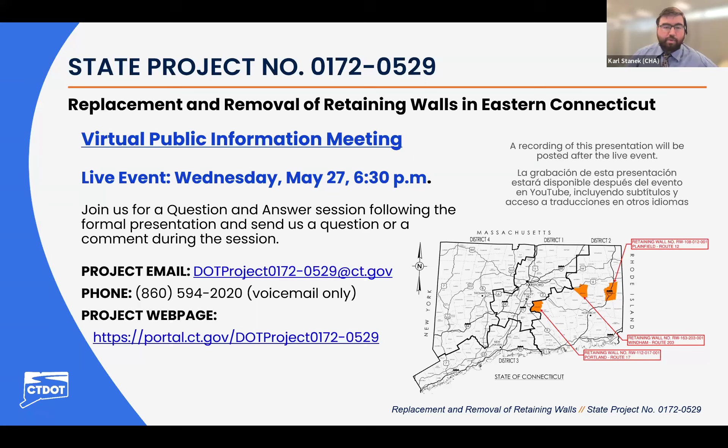First we'll talk about the general meeting overview and go through some housekeeping items. We'll introduce the project team and show you how you can interact with tonight's meeting through Zoom. We'll also have a formal presentation of the proposed design of the retaining wall projects, discussing first the wall in Plainfield, then a quick Q&A, then discussing the wall in Portland, another quick Q&A, then discussing the wall in Windham, followed by a Q&A that will encompass all of the walls if everyone has additional questions after. We'll explain the existing conditions at each project site, define the purpose and need, and talk about the proposed retaining wall and roadway improvements.

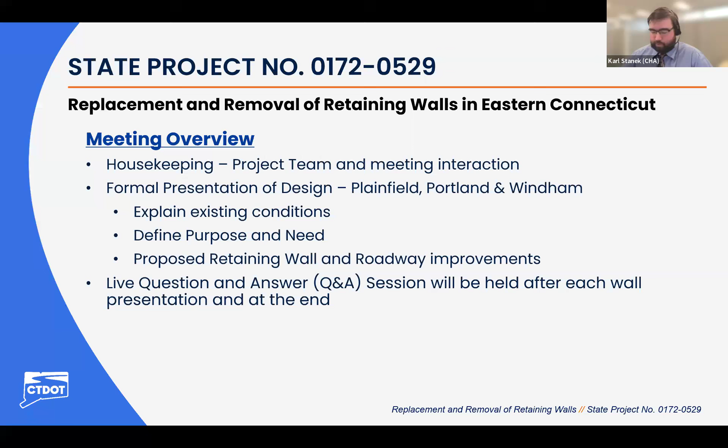First, we'll talk about Title VI and your civil rights. No person shall, on the basis of race, color, or national origin, be excluded from participation or subject to discrimination in the development of this project. Title VI information can be found at the following link, which, if you're audio only, is portal.ct.gov/DOT/opportunity-and-business-development/TitleVI.

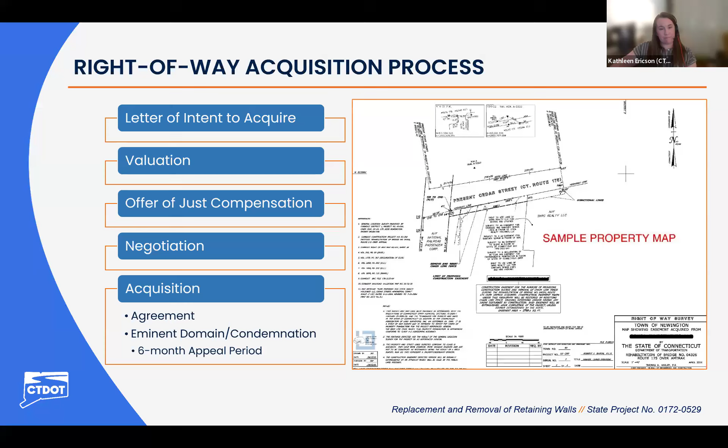Thank you, Kathleen. As we discussed, we will be talking about three walls tonight located in the east part of the state. The first being Wall 108-12001 in Plainfield, then Wall 112-17-1 in Portland, and the last Wall 163-201, 203-001 in Windham. Spread out a little bit, but all in the District 2 maintenance district in each part of the state, which is why they were chosen to be included in this single project.

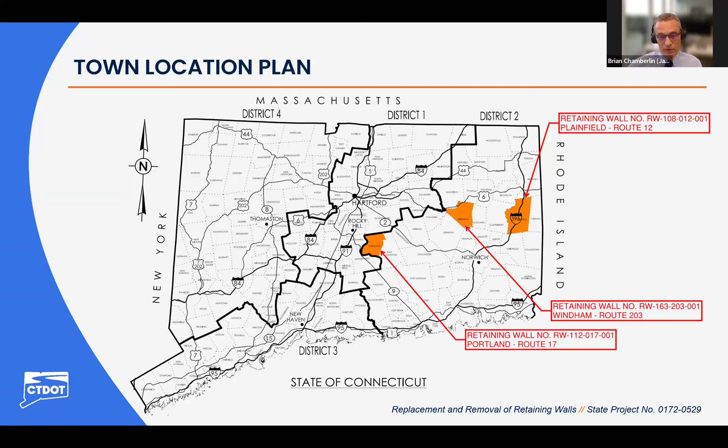Next slide, please. I'd like to start talking about the project's purpose and needs. Our purpose is to address deficiencies of retaining walls to accommodate safe travel for all people using the roads. We need to identify and repair, remove, or replace sections of deteriorated walls, maintain stability of the walls or the slopes, maintain functionality of all utilities, and most importantly, maintain safe travel on roadways, both during and after construction.

Before we go too much further in the presentation, I just want to give a little background as to where we're here today. This is actually the second phase of an ongoing program. In phase one, the department initiated a statewide inventory of these existing walls. We visited and created summary reports with a condition assessment at each site. The department reviewed these reports, and based on the condition reports, they selected a number of walls that they felt needed further attention. That's where we are here tonight. This is phase two of the project, in which we've done a more in-depth assessment of the walls, and we'll be presenting our recommendation for addressing the current conditions.

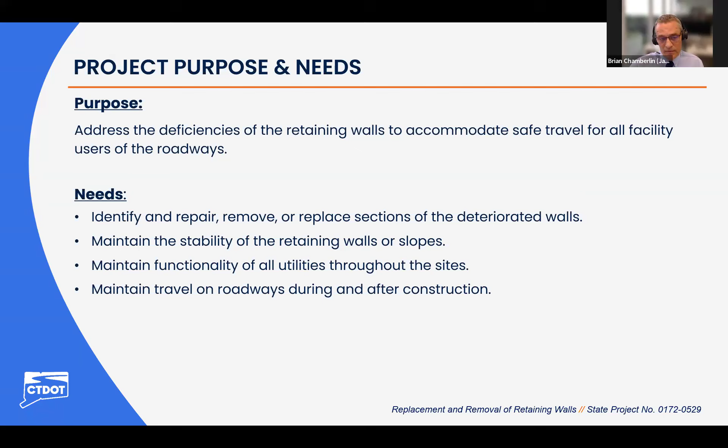Talk a little about the schedule and costs we expect. Design and advertise will be late summer, early fall of next year, 2027. We expect construction to begin spring of 2028 and be completed fall of 2028. So it's a single construction season project.

The approximate cost estimate based on current design status is $4 million for the three walls being presented tonight, and that will be with 100% state funds. There is no cost to the towns. We'd note that this cost and schedule are preliminary and subject to availability of state funds, and may change as the project continues through the design phase. We are still very early in the design process.

Next slide. So the first wall, as I mentioned, is in Plainfield. This is a retaining wall, 108-012-001. If we take a minute to explain the wall numbering system, the RW obviously is retaining wall. What we've done is each wall gets a 3 number group designation.

The 108 is the town number, for Plainfield. The 012, the second number group, is the route number of the road the wall is located on. This wall is located on the southbound side of Route 12. The 1 is just the numbering of the walls - this is the first wall in the list of walls on Route 12, so 001.

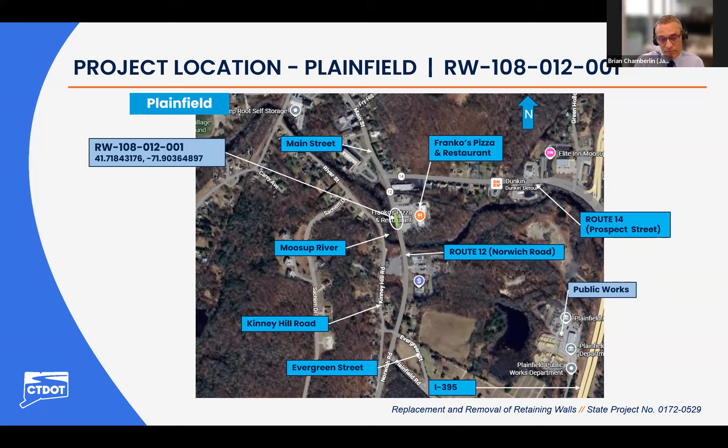Next slide. The wall is a dry masonry wall, and the year of construction is unknown. The wall is approximately 150 feet long, and the average height is about 8 feet. It supports Route 12 along the Moosup River.

The total wall length is about 150 feet, but the wall ends flare away from the roadway at each end and tie down into the slope at both ends for the grading. The roadway itself, Route 12 or Norwich Road, is a two-lane roadway carrying northbound and southbound traffic.

The road is classified as a minor urban arterial road. The average daily traffic, the ADT, based on 2022 counts, was approximately 6,200 vehicles per day. The posted speed here at the site is 30 miles per hour. Note that the posted speed does increase to 40 miles per hour south of the existing wall on the southbound side.

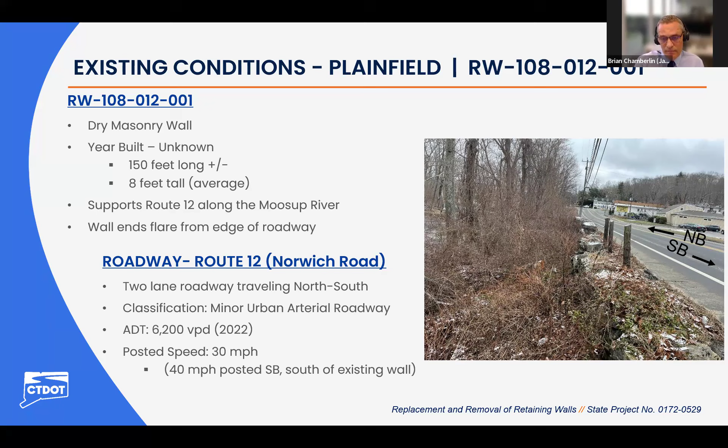Next slide. Talk about the existing conditions of the wall. First, start with the condition definitions. It's a very broad scale, a 3-point scale going from 0 to good. I just want to note a 0 or poor rating doesn't mean the wall is going to fall down. It's a very broad scale giving us a way of assessing the walls overall.

Looking at the condition notes, there were two areas noted with wall face bulging, about a 6-inch bulge, bulging outward about 30 to 40 feet from the ends of the wall. Based on current department guidelines, a bulge in a masonry wall is an automatic 0 stability rating, which is what we've assigned here. So the stability rating is 0 just due to those wall bulges.

But the backfill settlement rating is 2. There is no settlement noted of the roadway above. The wall is functioning as designed, so there's no current concern of wall failure. We give it a structural rating of 1. Obviously it's a fairly old wall, so it's not new anymore, but structurally it's in relatively fair condition. But there are some areas we felt would require being addressed based on the overall condition.

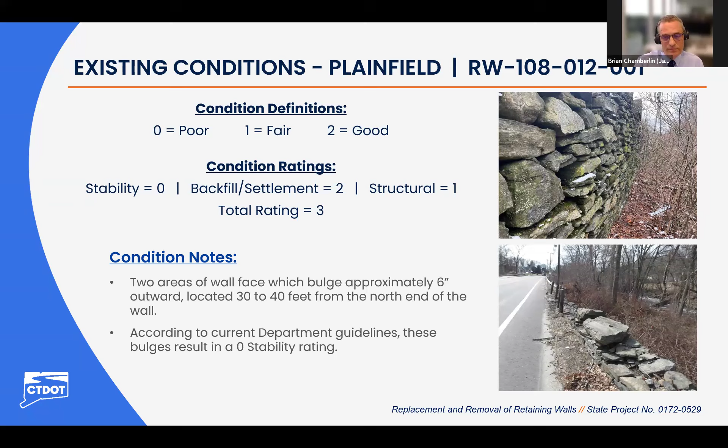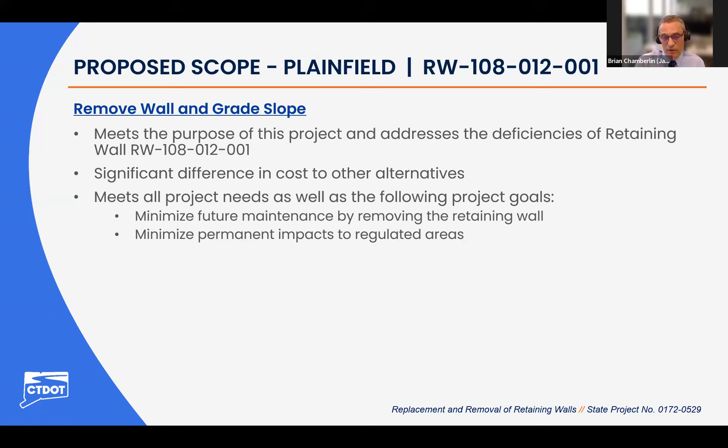Next slide. So our proposed rehabilitation method for this wall is to remove the wall and grade the slope, providing a graded slope to support the roadway. This meets the purpose of the project and addresses the deficiencies of the wall by virtue of removing it. It is significantly less expensive than other alternatives we'd studied, and it meets all project needs: it minimizes future maintenance since the wall being gone means there is no maintenance, and it minimizes impacts to regulated areas since we're not providing a new structure in a sensitive area.

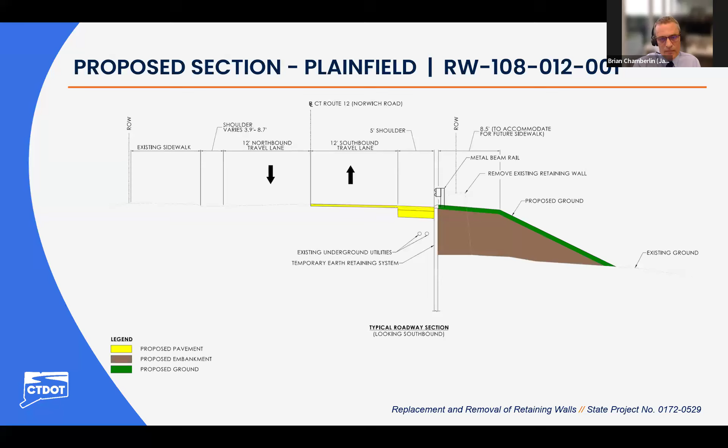But again, looking at providing a 12-foot travel lane and a 5-foot shoulder, then grading down. I'll go ahead, Carl. Thanks.

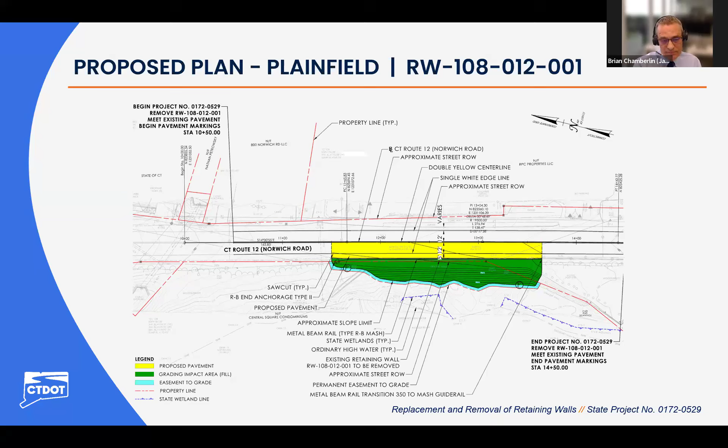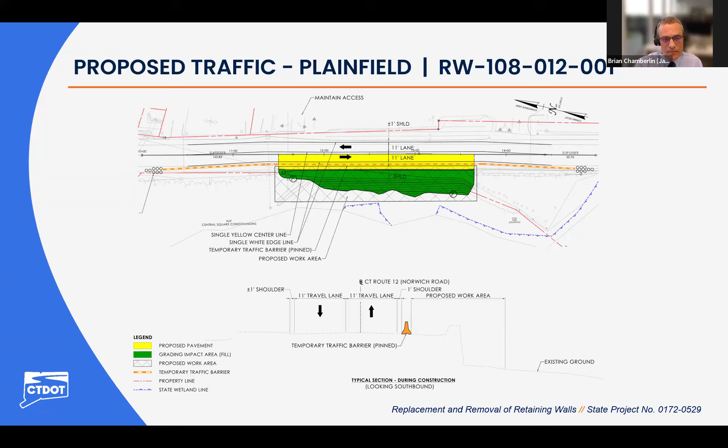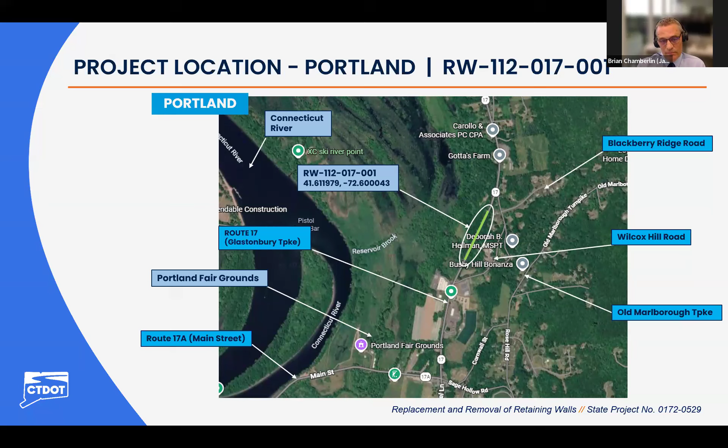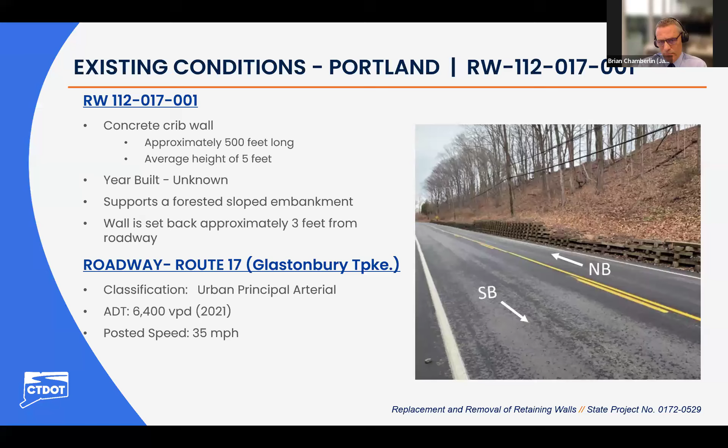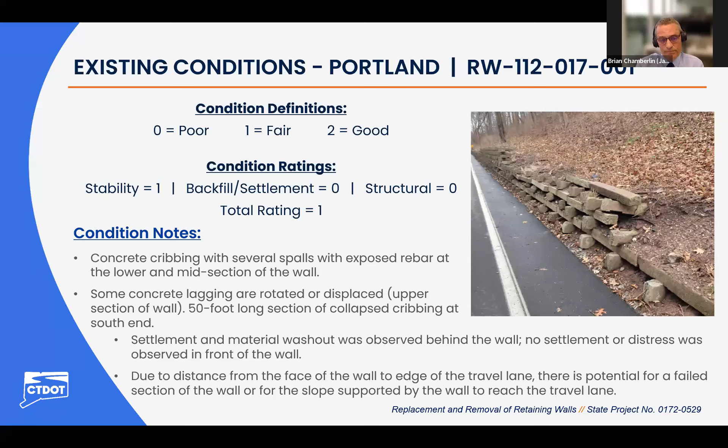Next slide. The proposed rehabilitation scheme at this wall is to replace it with a prefabricated modular wall system. To quickly run through the expected construction sequence: we'd first install a temporary earth retaining system, called TERS, to support the slope during construction, then remove the existing wall and excavate for the proposed wall. There will be a need to relocate some utility poles.

You might have seen those poles in the pictures behind the existing wall. We'd install the proposed wall system, install underdrain and backfill behind the new wall. There'd be a drainage swale at the toe of the slope, plus a new roadway drainage system along the northbound side in front of the wall, and full depth roadway reconstruction of the northbound roadway, including reconstruction and expansion of the shoulder to 5 feet.

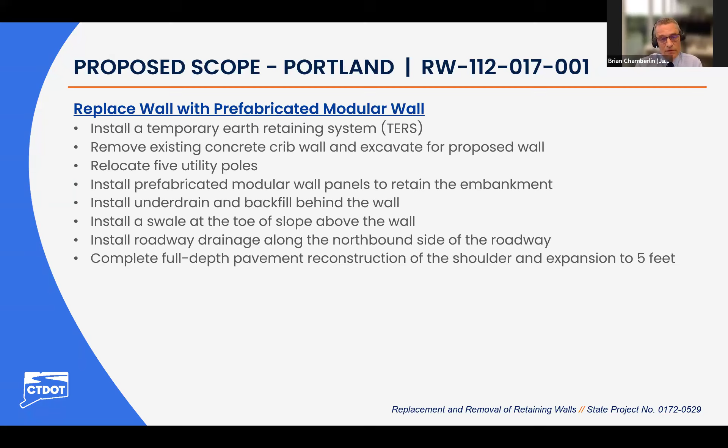Next slide. Here we see a section showing the proposed wall. Similar to the last wall, on the left side of the roadway center line, the southbound side of the road, there is no proposed construction. Moving right from the center line, we propose to resurface the northbound travel lane at the end of construction to restore good conditions with new pavement. As mentioned, full depth roadway reconstruction of the shoulder, leaving a 5-foot shoulder.

Behind that is a 7-foot 9-inch slope shelf up against the roadway face. This roadway, the shoulder reconstruction and the slope face, that's the current location of the existing wall that's being removed. We're pushing the wall face back several feet from the existing roadway edge, making room for that slope face. The orange block represents the modular wall system. The department has several accepted types of prefabricated modular wall systems that the contractor can select. This represents one, but there are different options that might be chosen, all serving the same function. The brown with the proposed backfill, we're sloping at a 2-to-1 slope and tying it to the existing ground back behind the TERS that we see supporting the existing ground there. That curved area is the drainage swale behind the top of the wall surface, which will catch the slope drainage and convey it to the existing drainage system. There is an under drain behind the wall to capture any backfill drainage.

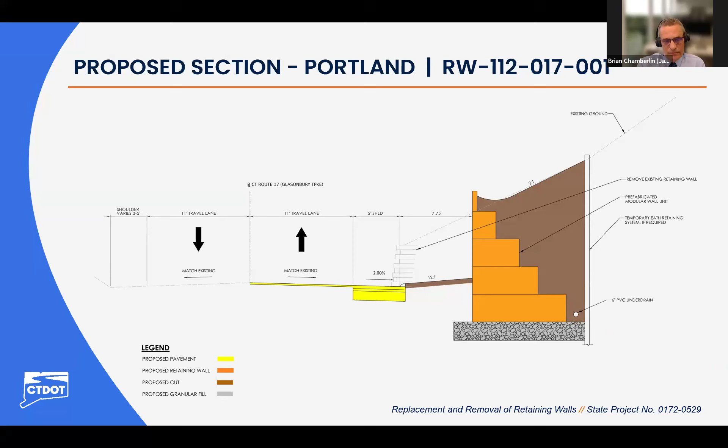Now this is a plan view showing the construction zone. The brown area is the slope behind the wall tying into the existing grade. For most of the wall length, we're not having to go very far up the existing hill to tie back and catch the existing grade. Only one area at the north end of the wall, on the right side of the page, is there a slight need for a grading easement where we're tying in quite a ways up the existing slope. The yellow again represents the roadway reconstruction limits.

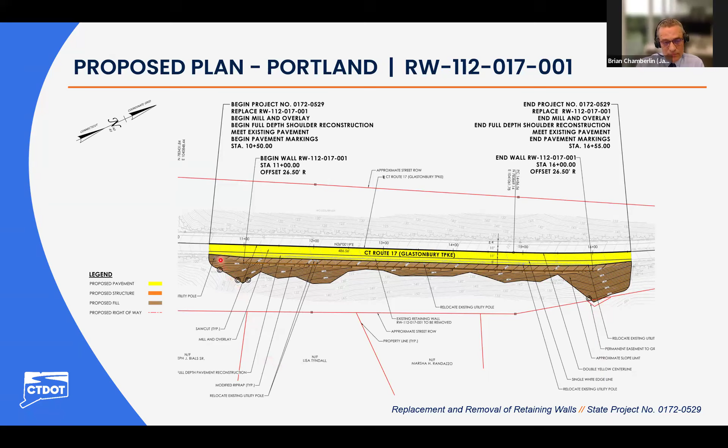This is an elevation view of the proposed wall. Given the length of the wall and the shortness of the page, we exaggerated the scale a little bit vertically and horizontally, so it looks a little squat. What we're trying to show is that the wall height will change as we traverse along the roadway slope. Midspan of the wall will be the highest point, and as we get to each end of the wall it will get shorter, lower, to tie into existing grade. This is a view of the face of the wall, kind of what you would see as you're driving along the roadway.

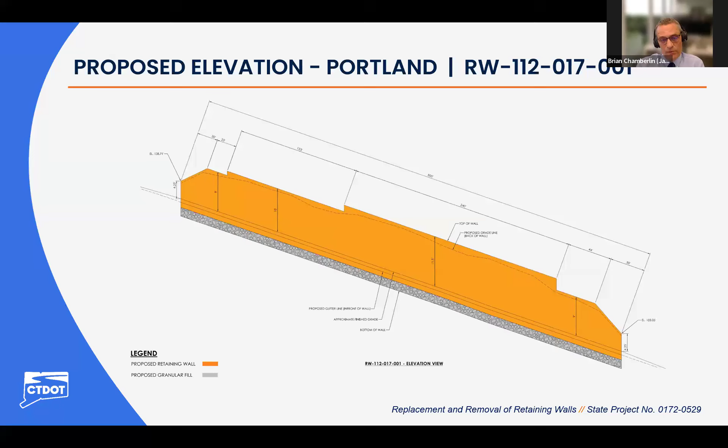This is a view of the construction zone, the hatch area being the construction area. The section view below shows we're proposing alternating one-way traffic through the construction zone. We'll move traffic to the west side of the road to a single lane of traffic to pass through. This will be signalized alternating one way, with a traffic signal at each end of the traffic pattern. Because of the length of the traffic pattern and the shortness of the page, we're not showing the whole traffic pattern here. The signals would be a distance off to the left and right, but a traffic signal would be set up to control traffic flow through the construction zone and move traffic away from it to give the contractor room to work, while removing the existing wall and installing the proposed retaining wall and grading.

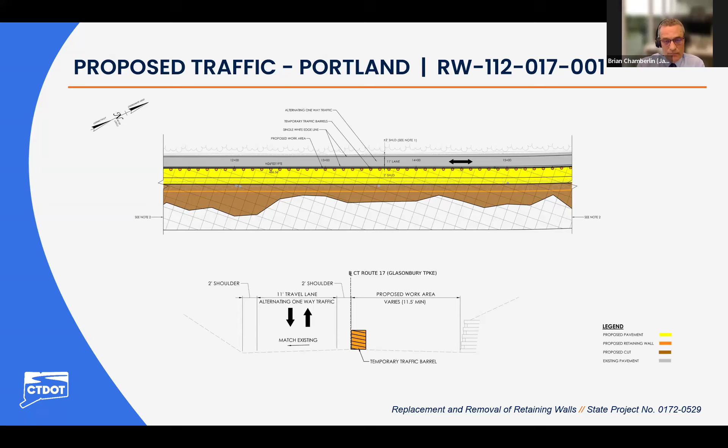Our project impacts: there are some environmental impacts just by virtue of the fact that we're having to remove trees, including grubbing along the slope. We will replace the slope with some sort of vegetation planted to restore the slope when we're finished. As for rights of way, there will be a small easement to grade in one area of the wall. Utility impacts: we noted 5 utility poles relocated up the slope a little further. Drainage impacts: we're installing new catch basins along the northbound shoulder of the roadway, along with the under drain behind the wall and a drainage swale at the top of the wall, directing surface water to the proposed drainage system, with the slope drainage going down.

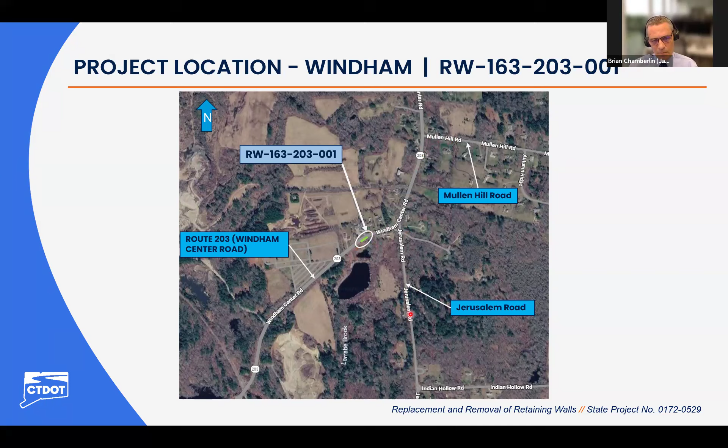This wall is also a concrete crib wall, approximately 150 feet long, with an average height of 5 feet. Again, the year of construction is unknown. It runs parallel to Route 203, supporting the northbound side of the road, just on the other side of that metal beam rail in this photo, approximately 3 feet from the northbound edge of pavement.

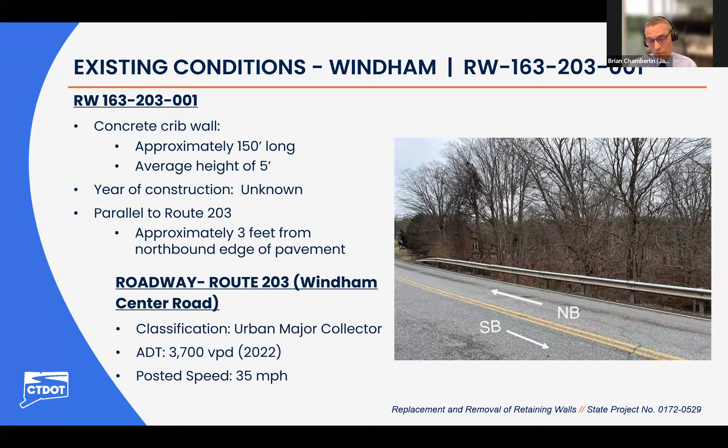Route 203, Windham Center Road, is classified as an urban major collector. The ADT here is 3,700 vehicles per day based on 2022 counts, and the posted speed is 35 miles per hour. Route 203 carries northbound and southbound traffic, two lanes total. Next slide, please.

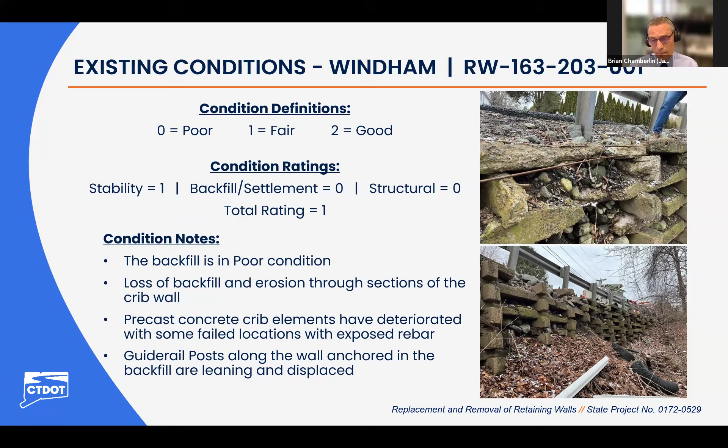Our condition rating, as with the last wall, gives a stability rating of 1; the wall is stable and there's no concern of imminent failure. But as discussed, the backfill settlement received a 0 condition rating given the condition of the backfill coming through the crib, and structurally it's also rated 0 given the condition of the structural elements. Next slide.

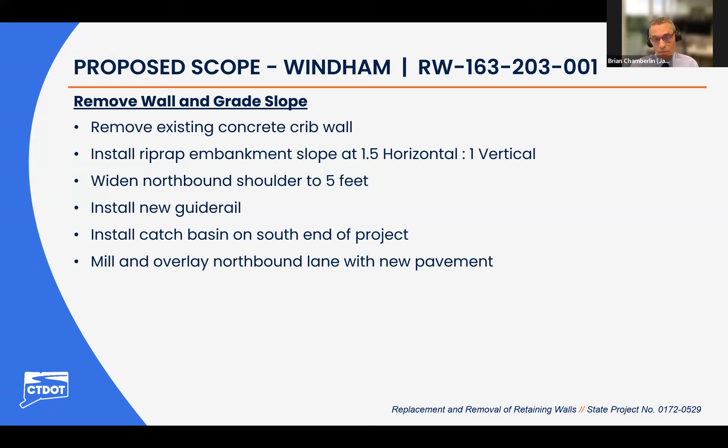Our proposed alternative here is to remove the wall and place a graded slope behind it, adjacent to the roadway. We'd remove the existing wall and install a riprap-covered embankment slope with a 1.5 horizontal to 1 vertical slope face. We'll widen the northbound shoulder to 5 feet, install a new guide rail, and add a new catch basin at the south end of the project. As with the others, we'll mill and overlay the northbound lane and place new pavement when complete. Next slide.